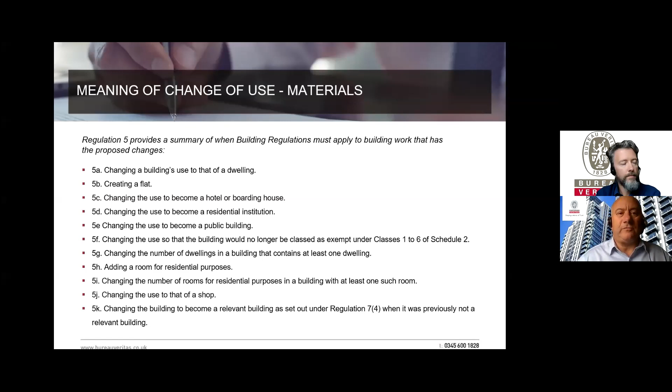So those are the criteria. The government have very nicely given us a new manual to the building regs, and I would advise people, if they get an opportunity, to download that. It's free on the MHCLG website. It's called the Manual to the Building Regs, and it gives a nice little table, which I've sort of embellished a little bit. It talks about the top row with all the types, 5.1, 5A to 5K, and then what the aspects are relevant to these types of buildings.

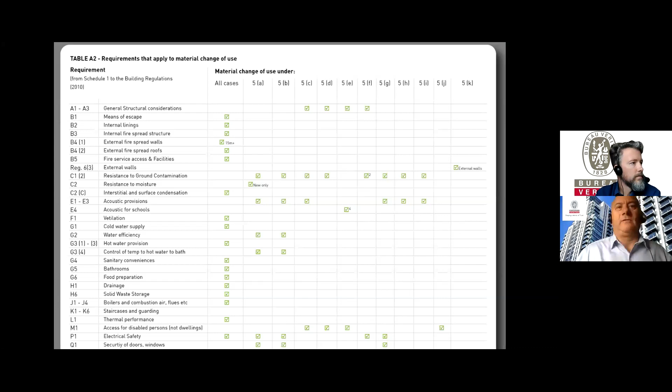Yeah, so that's how you would go through it. So you would pick out, in some cases - for instance, means of escape applies to all of these changes of use - whereas further down the line some, like H2, don't apply to a change of use. H2 would be drainage for storm water and the like. Yeah, so there are issues with that.

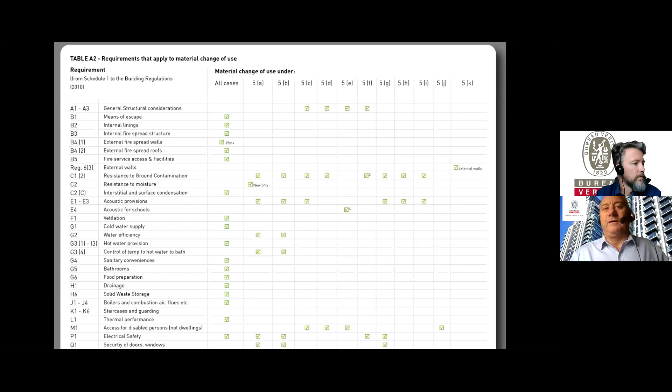And again, staircases - I put staircases in there. If you're not providing any and you're just leaving what is there, that's fine, because there is no requirement to upgrade or provide those staircases unless you are doing it for access, so it becomes part of the new build area. So you don't have to do anything under a change of use.

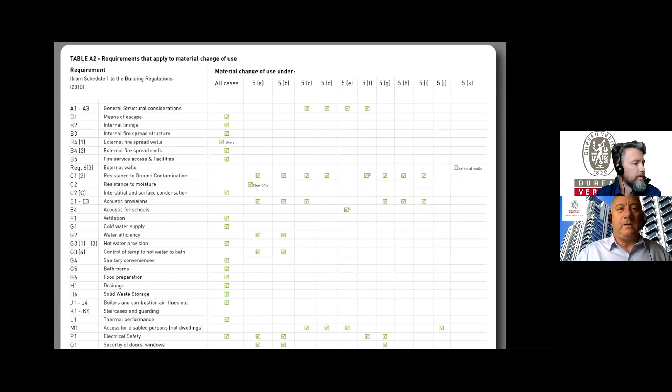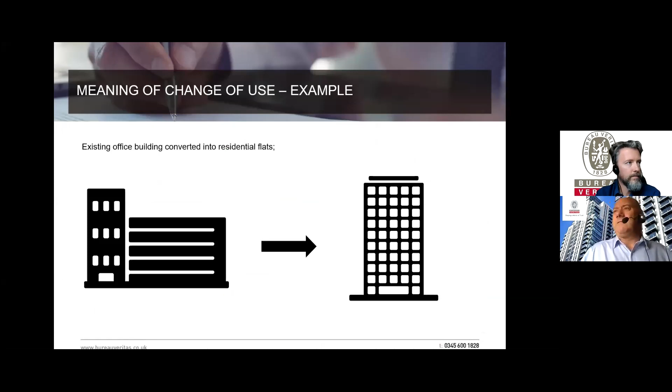Okay, so what do I do? I'll try to explain a typical example where we converted an office into residential flats. It could easily be, and very pertinently at the moment, changing the first and second floor of a retail unit or office unit in the high street to flats, because I think that's the thrust from the government, to release these kinds of developments. So I thought I'd run through that example.

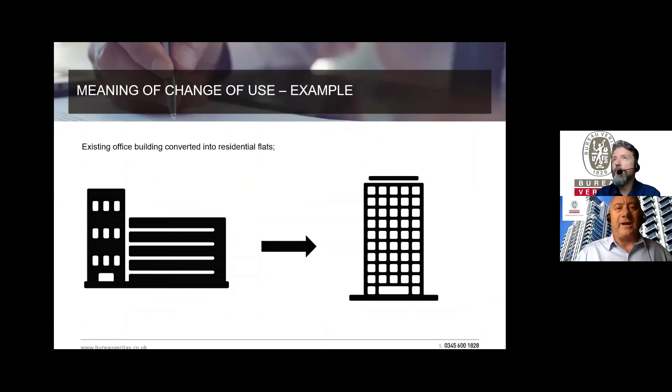I pulled together this table. On the left-hand side are the requirements for the regulations. Note, it is not everything - not all the regulations in what we define as Schedule 1, not all of A to R. You'll see that R isn't included on that list because it's not pertinent. R relates to the provision of broadband. You might want to put it in, but it's not a regulation requirement unless it's a new build.

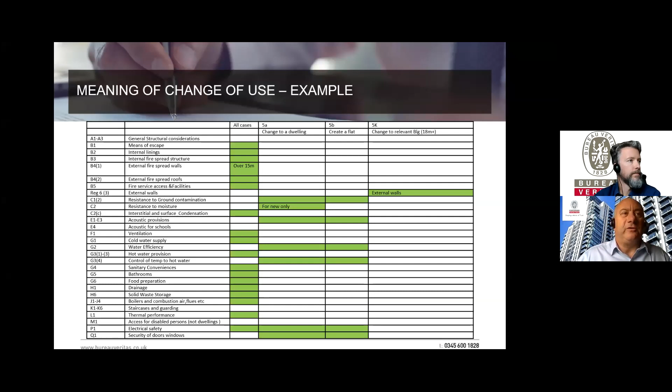The objective is to try and use what you can of the existing building, however making sure only the fundamentals of safety are adhered to. So you can see general means of escape, internal fire linings and structure are all taken care of. Fire spread for the external walls is relevant when it's over 15 meters in height. So if you've got a 2-story or 3-story building, you don't have to undertake an exercise adhering to the external wall fire spread issue because it's really deemed as being low risk.

However, if you look at Regulation 6(3), when you do a conversion to a change of use - let's say this office that happens to be over 18 meters - the external wall will need to comply with the non-combustibility requirement, and that will apply to the whole of the wall. So it's different facets for different parts of the buildings.

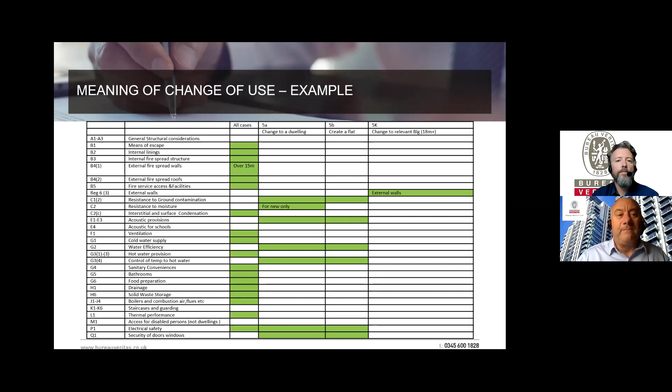You will note that it does not include everything. For instance, acoustics for schools would obviously not apply. And we talked about staircases again - if you're not putting a new staircase in, then you can maintain what you've got there. So there is no requirement to change the staircases.

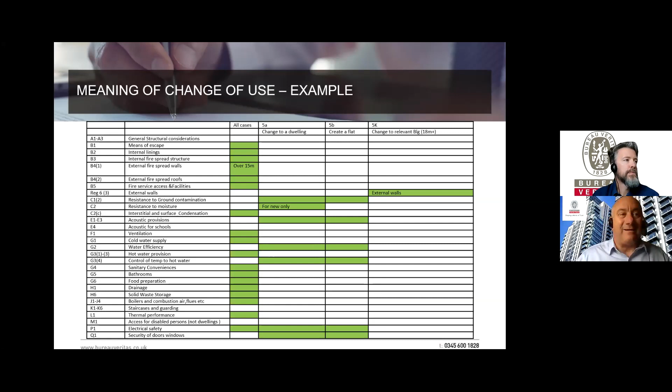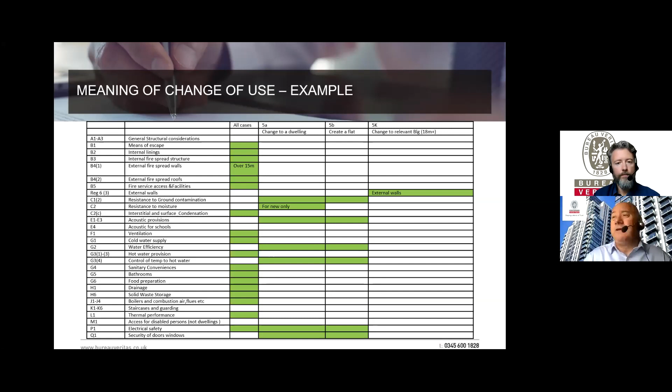So if you've got an office building that you convert, you can leave the staircases as they are. In theory, it should already comply with the basics - the handrails and the nosings. But there will be some instances where offices are quite old that might not comply with that issue, and certainly historic buildings would fall into that remit.

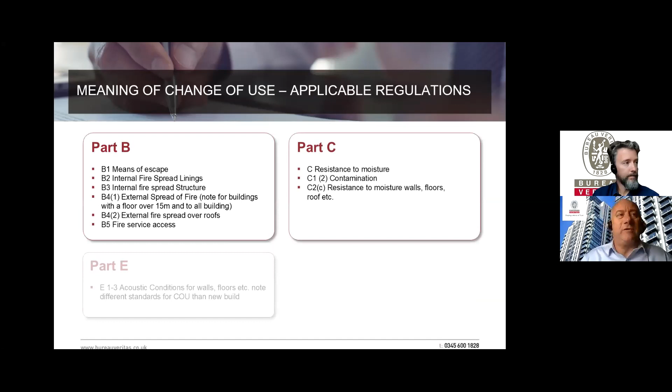Going through the actual requirements, we need to look at the means of escape aspects from the converted flats, or conversion to flats - within the flats themselves, the 9 meter rules, and also in the corridors, down the staircases and out. All that needs to be reviewed against Approved Document B.

Again, things like surface spread of linings - if you've got an office staircase that's got linings that perhaps are not Class 0, then you'd be expected to take them off and replace them with Class 0 linings.

Similarly with structure, you have to be a little careful with that. The requirement is such that if you have a building over 18 meters, you might require an upgrade in the structure, especially when converting to flats. It might then need to be 90 minutes as opposed to 60 minutes, and it depends on what the original building was constructed of. You need to do some investigation to ensure the structure matches up with what's required in Part B.

Talking a bit about external fire spread and spread over roofs - just be careful with the 15-meter issue. Again, you need to take account of the external fire spread when it's over 15 meters, one building to another. Normally you get greater compartmentation and greater fire rating in flats than you would in a typical office, and you need to be aware of that. However, if you go over 18 meters, you will need to think about the non-combustibility aspect.

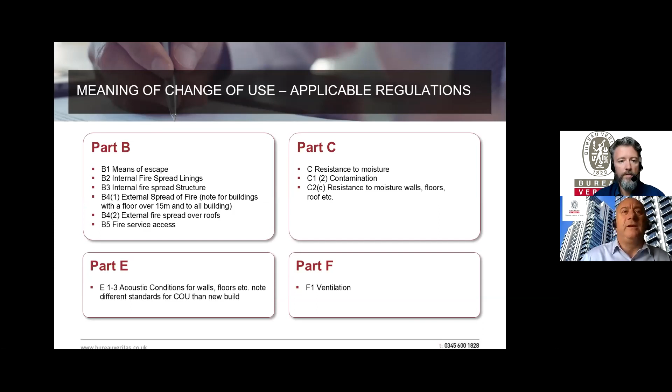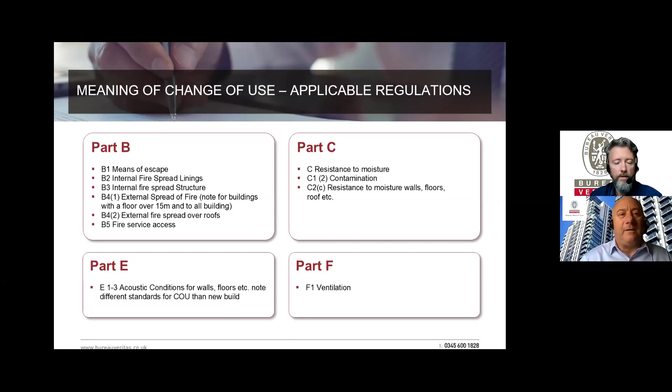Part C, you need to be careful with the resistance to moisture, both in terms of contamination and how we deal with ground floors and basements. And then acoustics, I'll leave it to my colleague Richard when we get to that part. And indeed, you need to think about ventilation, so we must make sure the air quality within our newly converted project complies with Part F in terms of air change rates, WCs having fans, and kitchens having the required extracts.

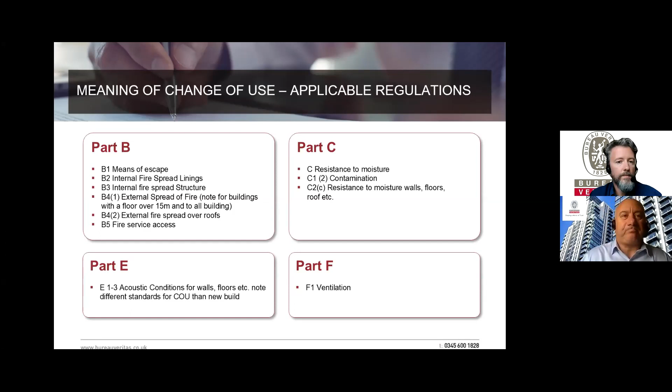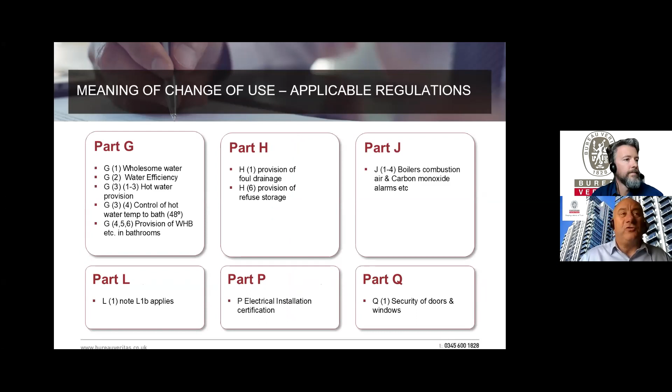It also includes interesting little issues, which are basically down to health and safety. We need to make sure we've got adequate water supply, cold and hot, and that the fittings we put in for the bathrooms are part of the efficiency drive, looking at 125 litres per person per day. We need to control the hot water temperature, and make sure we have provisions for wash hand basins in bathrooms. It'd be silly to provide flats or dwellings without that.

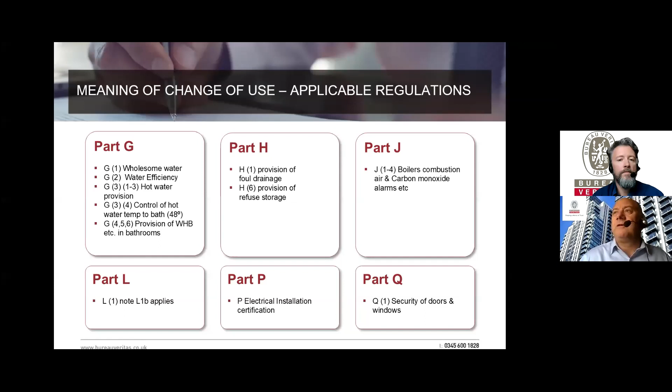Part H - if we're putting in bathrooms, we need to make sure we can adequately drain them, and we also need to make sure we get the required refuse storage, so that we don't pile up waste in the corridors. We have to make sure we've got bin stores and the collection agency all geared up.

Similarly, from a safety aspect, we've got Part J, which talks about boilers, making sure we get the right alarms if we've got that in there, and making sure we get them certified in terms of gas, etc.

And then one of the interesting ones for me is the inclusion of Part L. Just note, when it's a change of use, it is L1B, so there is no specific requirement to provide a SAP calculation. Neither do you formally have to provide that, although a lot of people do, because that's the mechanism to get the EPC, and sometimes if it's a warranty, then you would need to do that.

But from a building regs perspective, you are just moving down to the thermal requirements in terms of the overall U values for walls, and the services need to achieve minimum efficiencies.

Part P is electrics, and the electrics obviously need to be safe and certified - that's a key aspect of Part P for flats. And indeed security, again, is the minimum standard of making sure it's Part Q for the doors and the surrounds around the doors, and indeed making sure that the first floor windows that can easily be reached also have locks on. So that's a broad brush approach.

It is not the full approach to new builds, where it potentially is a little easier, so you have the ability to maneuver with just these being applied.

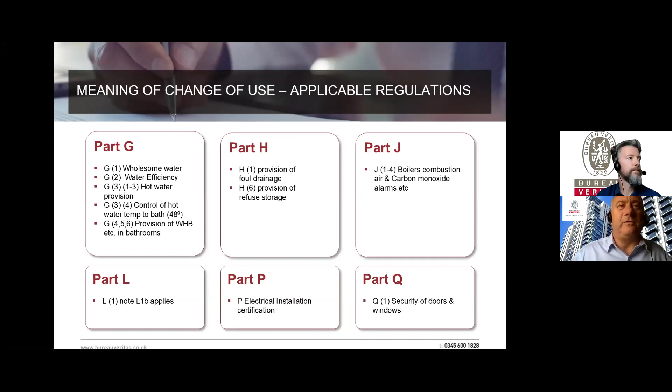Okay, so what I'll do now, I'll hand over to Rick to take us through some of the acoustic issues which form part of these kind of considerations. Rick: Okay, thanks Andy, and good morning everyone. So I've drawn together some of the acoustic considerations, as Andy says, for change of use.

So despite falling under permitted development, before any works commence, prior approval may still be required from the local planning authority in relation to a number of technical matters. Firstly, we need to consider how noise and vibration impacts to current occupiers of the building, as well as adjoining owners and occupiers, will be controlled. A report needs to be submitted to the local planning authority outlining this and the proposed construction working hours.

Secondly, you need to consider whether there's noise from neighbouring commercial premises affecting the future residential units. In doing so, the developer must apply to the local planning authority for a determination as to whether prior approval is needed for it. And that may have a bearing on the final item, compliance with the building regulations in relation to acoustic design of the units, especially if adjoined to commercial premises.

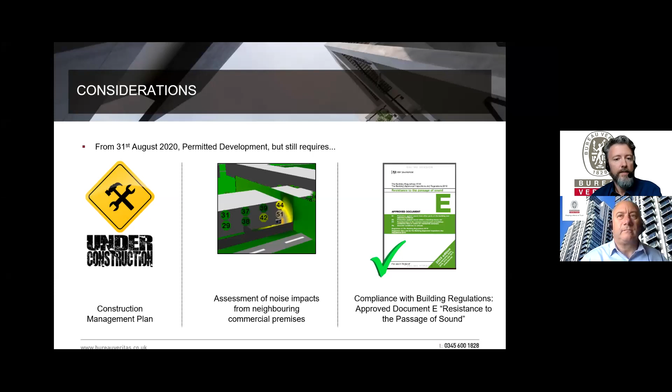So the first item, the construction management plans - these are pretty much well-established requirements, typically prescribed by the local planning authority, and you usually get that information from their website. You should include your expected hours of work.

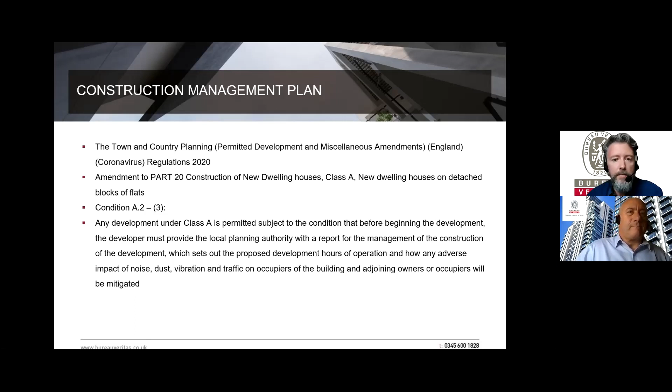Obviously these days people are working from home more, so we can't really assume that neighbours are away at work all day. So we're expecting that noise disturbance complaints are likely to be increasing, with people staying at home exposed to noise from construction works at their neighbours' properties.

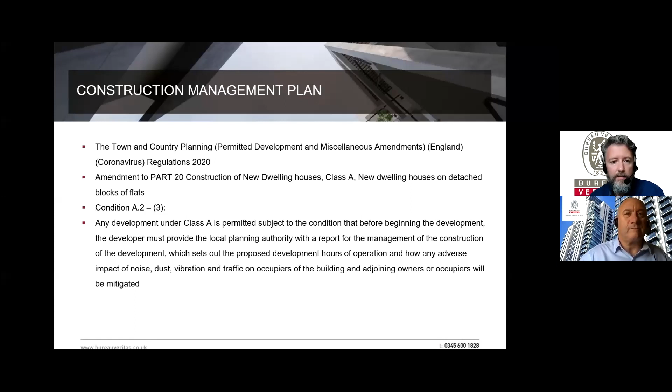And then on the back of that, environmental health officers - we expect them to tighten restrictions wherever they get the opportunity to do so. It's worth noting that noise and vibration measurements aren't often required for these types of works, given the short duration. Where we have had to do such measurements, it's typically been associated with basement excavations where there's more significant structural work going on.

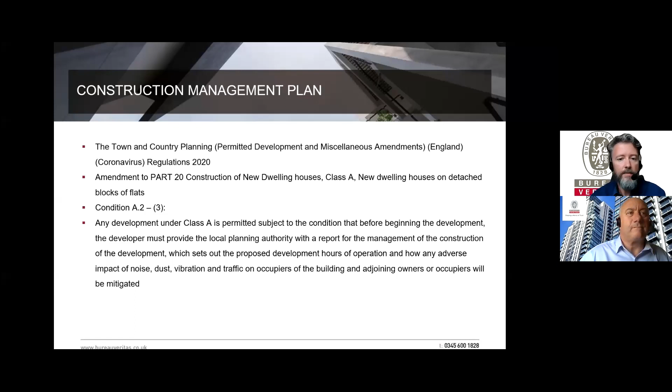Secondly, going on to the neighbouring commercial premises. This is quite a challenge, more so in mixed-use areas, where you might be dealing with noise from restaurant and takeaway kitchen extract units, which might operate into the night time, and also adjoining uses with background or amplified music, or high impact activities such as gyms. These can cause significant disturbance to future residents if not dealt with, so we need to assess the potential impact and mitigate accordingly.

That might take the form of looking at the airborne sound transmission from nearby mechanical plant, so you want to consider whether your glazing and ventilation specification is appropriate, or whether it needs improving. Or you want to look at the sound transmission through adjoining walls and floors, in which case you'll need to do sound insulation tests to determine the performance of the existing partition and identify any potential sound flanking paths.

This investigation might lead to a need for remedial measures, to improve existing constructions or to mitigate those transmission paths. It's best to have a full understanding of this before you start any works, because retrofitting can be costly and cause delays to the project.

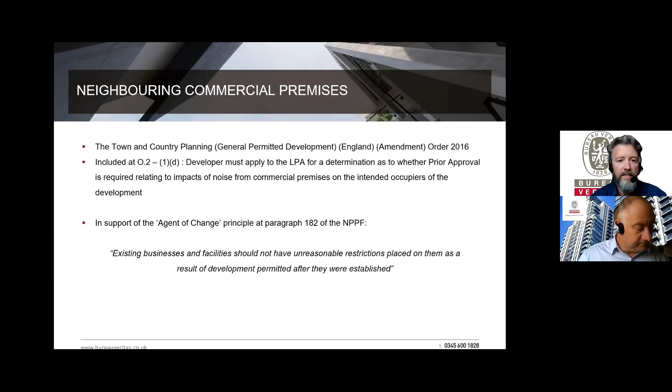In this case, you need to consider the different frequencies of sound being generated and how that might propagate into the building. It's particularly difficult if you're dealing with bassy amplified music, maybe at neighbouring bars or clubs, or adjoining gyms that offer exercise classes.

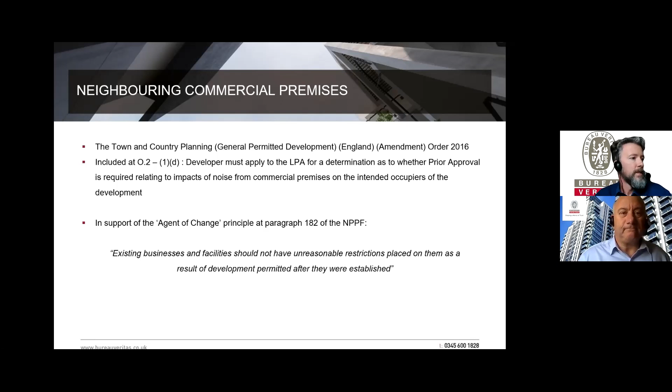So in terms of the building regulations, finally, approved document E defines sound insulation performance requirements for separating building elements, and a requirement to achieve reasonable sound reverberation in common areas.

It's critical to get input from building control and agreement at the outset of the conversion, to confirm that it is a material change of use.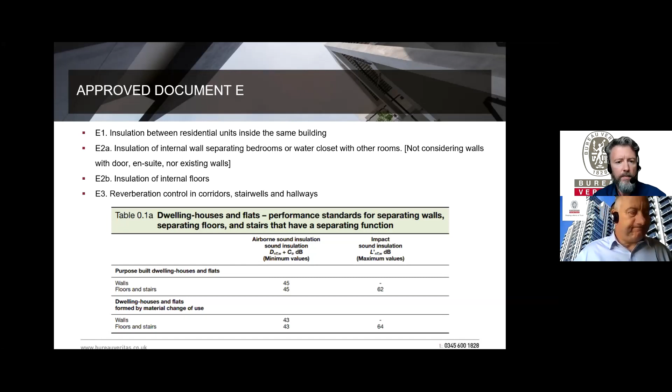So in terms of material change of use to residential, normally the biggest acoustic challenge is incorporating effective junction details, where you have new partitions, for example, meeting existing external walls and internal floors.

As per the previous slide, it's best to undertake acoustic inspection and testing before works commence and identify current sound transmission and flanking paths, as again retrofitting additional measures is likely to be more expensive and lead to abortive work.

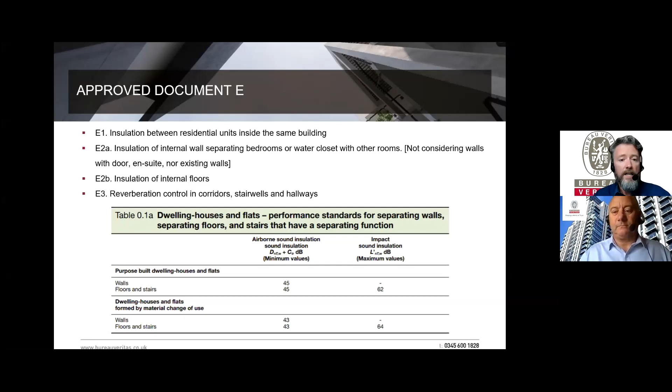And with that, I hand back over to Andy to carry on talking about the other factors in the building regs. Okay, thanks Rick.

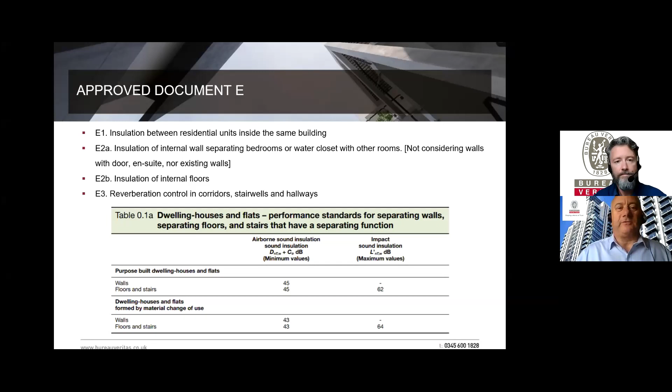I think the reality of the situation is that with the government pressing ahead with the relaxation, if you like, of permitted development, it's important to note these considerations. The government are also very focused on quality of housing, which doesn't just mean new build, so there is a thrust to try and get that quality aspect in.

But noting there is very clear guidance in terms of regulations about what we are required to achieve, which doesn't mean to say that we have to achieve everything a new build would in terms of the regulation aspect. However, it's something to consider. If you're building or converting offices to flats, why would you want a lesser standard, even if it's just a couple of dB reduction, which is allowed in building regs.

So you just need to think carefully about the market and what you're actually constructing or intending to construct. But the regulations are there to ensure the minimum standard - you can always go over it.

Okay, so that was the bit about change of use, and also some of it will flow into part of the other aspects of building works, which are outside the scope of, in theory, new build. One of which is material alteration. Material alteration is a complete definition on its own.

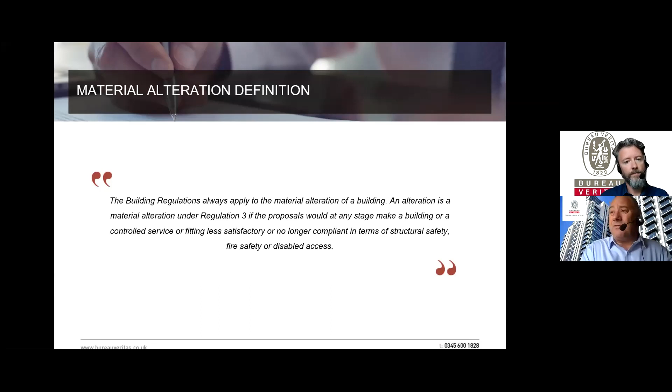The whole concept is not to make the situation worse than it was previously. So if you've got a building, and it applies whatever type of building you're doing, an office or a flat, if you alter the works, the construction, then you just need to make sure you do not make it worse in the majority of cases. And that applies for structural safety, fire safety, and indeed disabled access. So don't make the situation worse than it was previously.

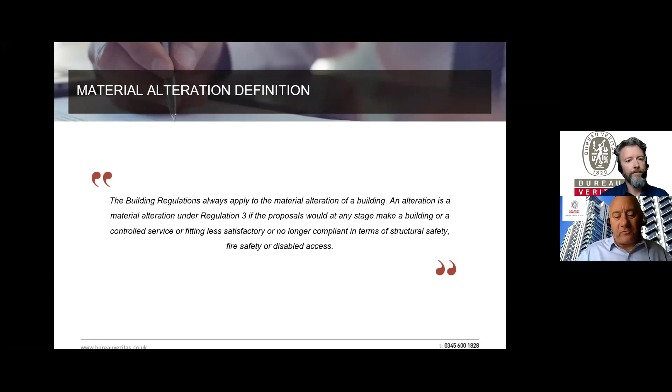Okay, so the third bit that I wanted to highlight on is probably one of the keenest issues, I suppose, is how do we deal with extensions? Domestic extensions are relatively simple. However, how do we deal with blocks of flats, and how do we deal specifically with where we want to put what we call airspace extensions on? So we're building above others, and you can use this analogy for all kinds of types of buildings.

Generally, the extension itself has to fully comply with all the new requirements, A through to R. So they need to fully comply. However, the other bits of the building may not, and you may get a conglomeration of aspects.

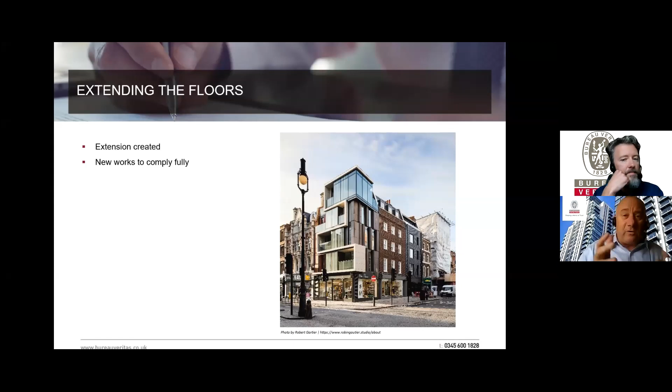You may get an extension, which is built on the side, the back, the front, or on top, and you may get a conversion or change of use for perhaps an office to change some of the lower floors into residential. And then you may get a material alteration where you are reconfiguring the shops at ground floor. So you're going to get a mix of all those together to formulate your plans for redevelopment of a particular site or building.

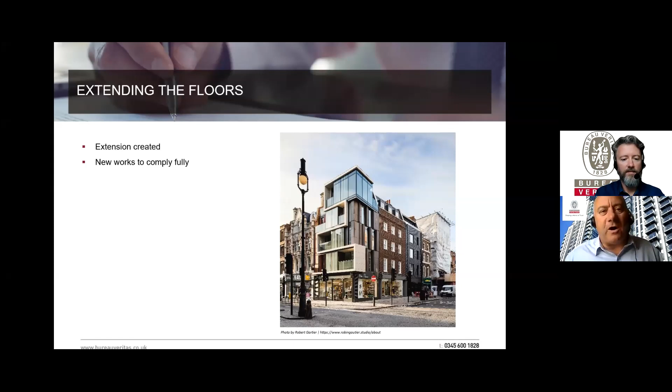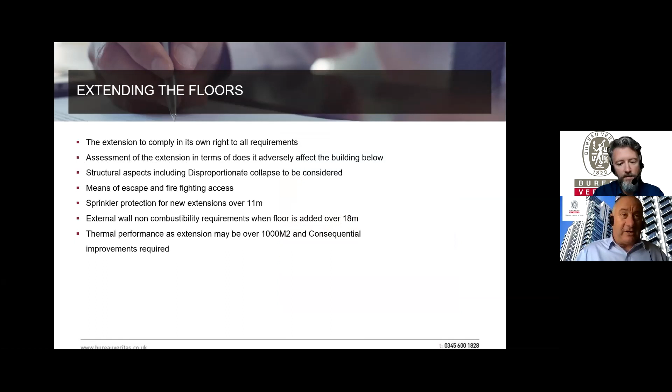And all of which comes with a different set of requirements, and it isn't a one brush fits all. So we just need to be a little careful on how we apply aspects and what we apply when. The government have got some quite strong thoughts on that, but they need to be aware of what the requirements currently are. So in terms of an extension, let's say we've got a 3 or 4 story office building.

And we put an extension on the top for a typical flat development, then the extension would need to comply in its own right with all the requirements. We need to be very careful with that, especially with the new introduction of sprinklers in residential buildings over 11 meters. So if your 5th story addition comes on, then you will be required to provide sprinklers in the new extension for sure.

It does not, though, mean that you have to provide sprinklers throughout the rest of the building, although I guess a lot of fire departments and indeed building control may recommend that you provide it throughout, but sometimes that is not feasible. So we just need to think about what we do, and does the upper part of the building adversely affect the lower part.

We need to think about the structural aspects and making sure that whatever we put above in terms of the extension doesn't add a disproportionate collapse aspect to the building. So if one of the members' columns or part of the floor collapses on the lower part, does that need to be strengthened? Does that need to be tied in, because you've now added an extension on top of the building? We just need to be cognizant of that for the disproportionate collapse aspect. Means of escape and firefighting access is very key.

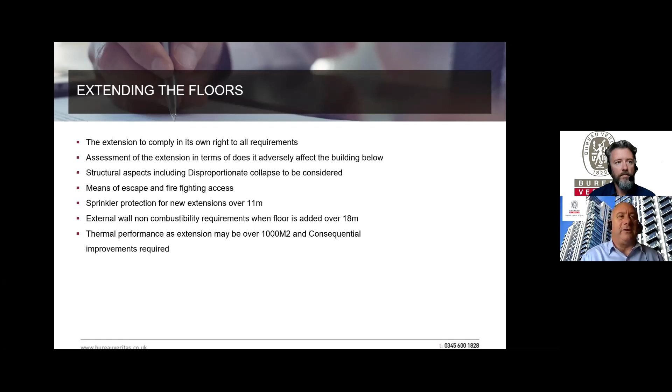So we need to make sure we can get people out, and we need to make sure we can get the fire brigade into the building. If you're building extensions over various heights, 18 meters for certain, you'll need consideration of a firefighting shaft, and potentially a firefighting lift if it's over 18 meters. So we need to be careful with that, as it will bring issues for the existing building you're reviewing. Even if you build a block of flats 2-3 stories above an office development that's currently there, you will need to take account of the offices when looking at the firefighting shaft.

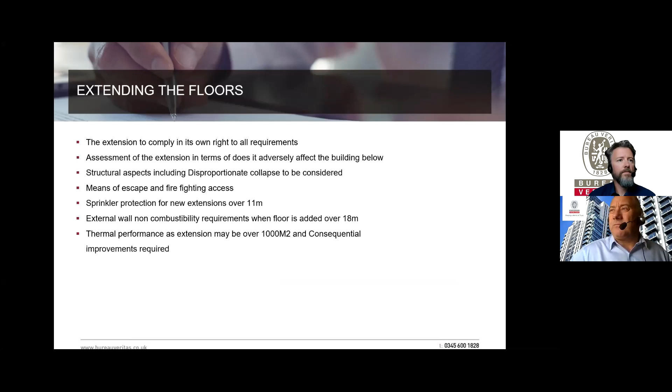So you need to be careful with the codes and how you apply them. The expectation is that the extension will fully comply. If that means it's connected to the offices, you need to think about how many staircases you've got. If it's a single staircase connecting over more than 3-4 stories, you need to think about what added protection you need to provide to stairs and lobbies, etc.

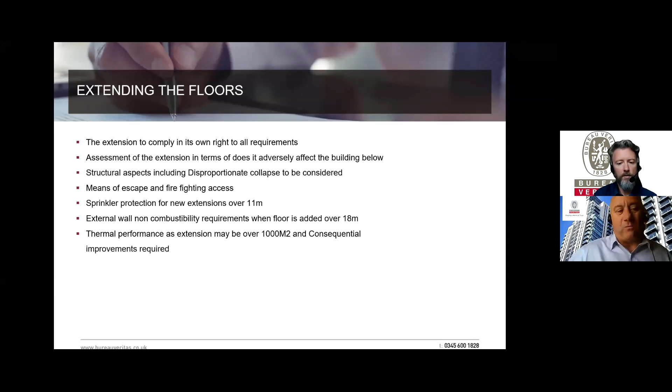One of the requirements under the change of use is to think about the external wall and the non-combustibility requirements. Clearly, if you build an extension over 18 meters, that part of the wall would have to comply. But under the change of use, you would also need to ensure the rest of the wall complies with the non-combustibility requirements. It isn't simply acceptable to cap it off and say whatever's built below can stay, because that would have an adverse effect on the extension above.

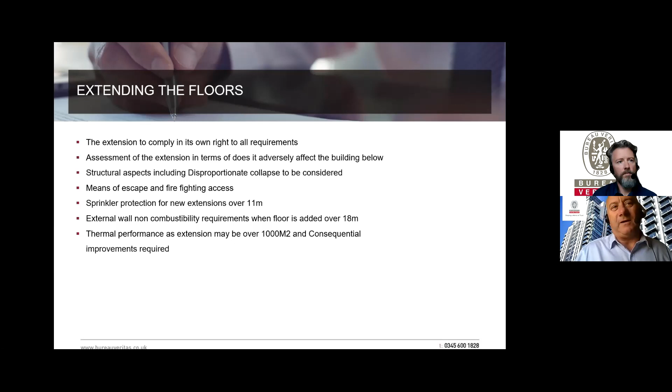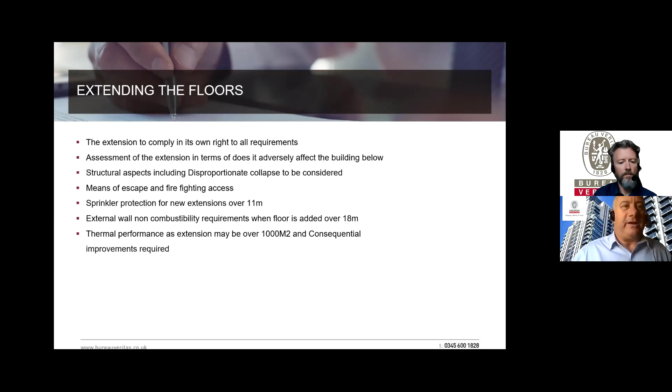Thermal performance - one of the interesting things is that the government, when they published some guidance, talked about consequential improvement, although I'm not absolutely sure myself that this would be applicable. We need to think about the square meterage. If it's over 1,000 square meters, you may have to look at consequential improvements on the existing work, which would be an interesting concept to implement, especially when you're building an extension but not doing much work to the existing building below.

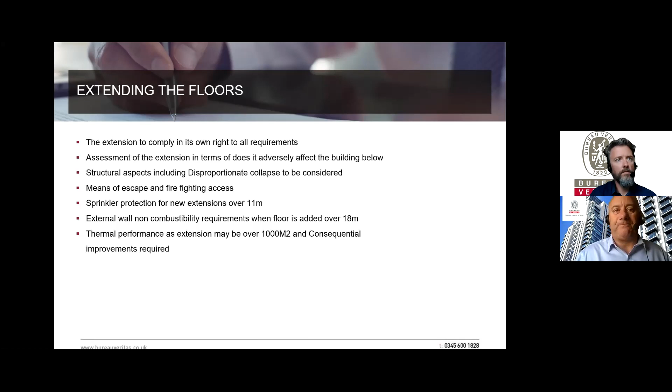So some of the key aspects, especially when talking about extensions above existing buildings and what's called building over the airspace, you need to make sure the means of escape is correct. The way to do that is to ensure you comply as fully as you can with the requirements from ADB or BS 9991 or BS 9999. And if you can't, then you need to look at a fire engineered type solution.

Travel distances are normally 9 meters for typical developments in town centres, but where permitted development is targeted, you should be looking at the smaller end of flats. You can have staircases, but for duplexes they should be protected staircases. You need to make sure the corridors themselves are fully protected, and where there's a requirement for ventilation, put them in either as a ventilated corridor, which is up to 7.5 meters with a natural vent solution. If you put sprinklers in the flats, you can go up to 15 meters with a natural ventilation system.

If you go outside of that and go longer in terms of the corridor, then you're into mechanical ventilation, and you need to make sure you adhere to the Smoke Control Association guide for the positioning of the vent, which needs to be at least 2/3 down the corridor, and make sure all the equipment is in line with that guidance, with the necessary backup and power supply, etc.

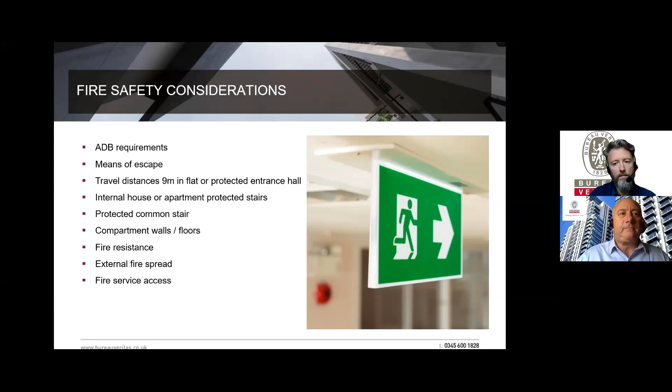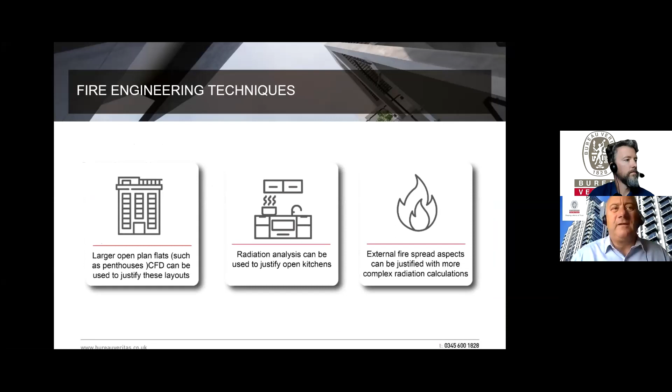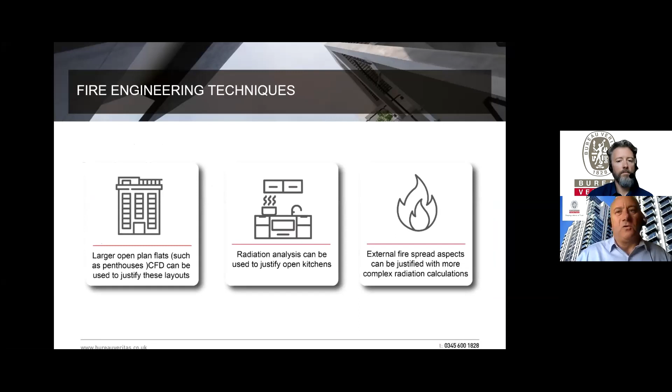Okay, there are some engineering techniques you can use for larger open flats, such as CFD. You need to think about the positions of kitchens and where they lie in terms of the escape routes, and there is potential for radiation analysis. You can do some more complicated requirements for fire spread, which rely upon the radiation calculations, all of which will need a fire engineer to assist you with.

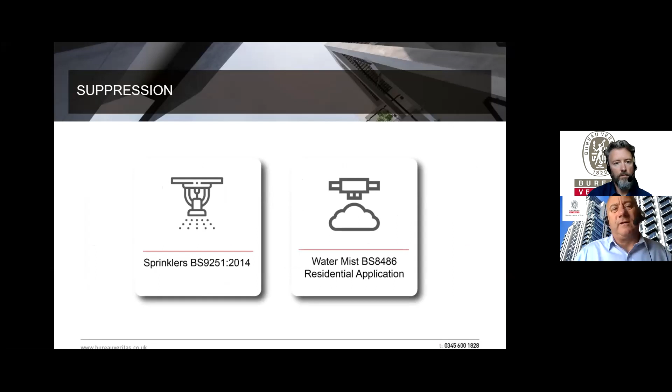Suppression, very key. We talked about the new part of the construction, i.e. the extension, needing to have suppression. It can be sprinklers, but it can equally be water mist. There are difficulties sometimes with tank sizes, and the water mist would be an added advantage. It also has the advantage of less damage in terms of its water application. So there are some plus points cost-wise, though I'm told that they're probably equal.

Again, we talked a little bit about firefighting, making sure we've got adequate fire brigade access, and just think about basements. If you develop a basement, you need to think about getting people down there and smoke control, etc. So it's well worth reviewing that in terms of either a change of use or whether it's part of the extension.

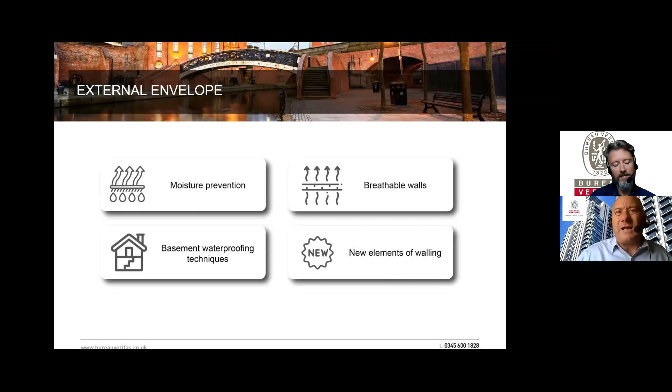Other aspects of building regulations, and we've talked through a lot of these, but just be careful with that. Obviously, if the extension has parts of it, then it's a higher standard than the change of use. We've obviously got to try and make sure we don't get water in the building. But some of the buildings can have breathable walls. We've got historic buildings that we've got to deal with, so we need to be a little careful with how we approach that.

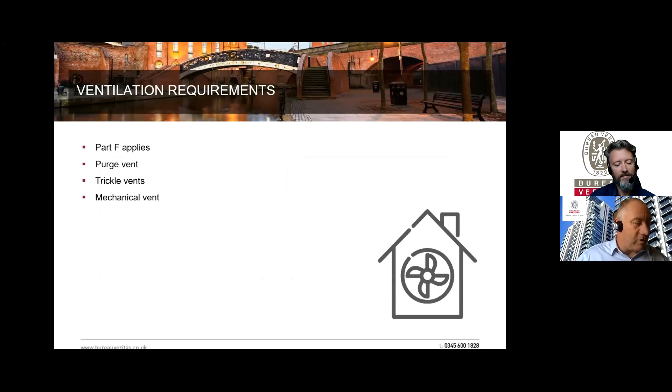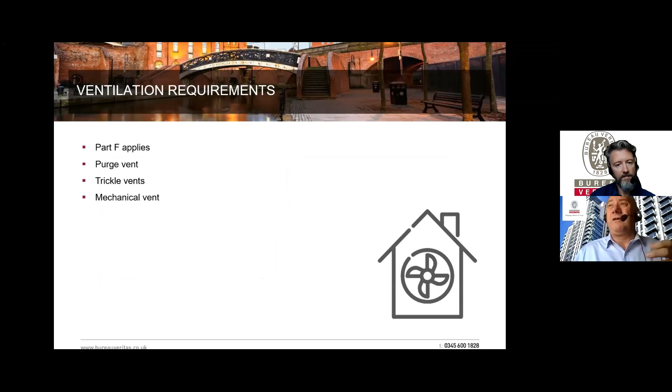Ventilation is key. Obviously want to make sure that buildings are constructed in line with the requirements of Part F, making sure we've got purge vent so the windows can open. If you've got a problem with the windows opening because they're on the facade, then you're going to have to look at mechanical ventilation solutions, which can be quite tricky because they end up with bigger units, bigger ductwork, and obviously bigger risers, which are difficult to get into buildings, especially if they're existing scenarios.

We need to do water use calculations. They are relatively simplistic now. There are tables that you can use, and you can just get the fittings off the contractor, and you can calculate those out. Pretty simple. And to make sure we can adequately drain to reasonable existing places of drainage, so we don't overload the sewers, and making sure that it can all be roddable throughout.

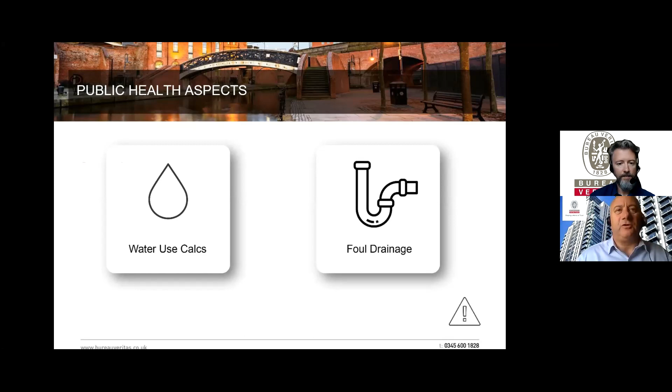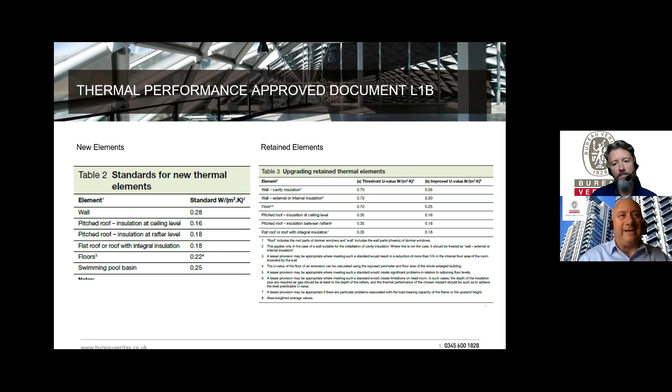Some other aspects of thermal performance. Again, for the extension, you will be using L1A, so you would need a SAP calculation for L1A. But if you're doing the change of use, then you are into this scenario of looking at the thermal performance of the fabric, which is a more simplistic issue. It becomes more complicated if you want to deviate, and then you're using the SAP calculation itself as part of the methodology for the deviation when you're looking at change of use. So that is available to use, but again is a more complicated scenario.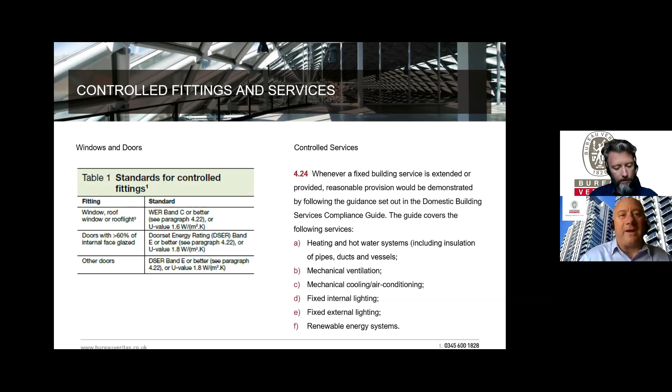Obviously, you've got to make sure that the fixed building services are relatively efficient, and they cover ventilation, the heating, the lighting, and potential for renewable energy if you're going down that avenue. Although, again, if it's not a planning issue, because you're doing a change of use, then you won't have a planning problem because there is no planning application for it. However, if you're building an extension, then you might be into the planning aspect, which is slightly different. Okay, so that's how we deal with the SAP calculations.

And then finally, the requirement for security again is important. Making sure we get PAS 24 standard for the doors and the surrounds. Making sure we ensure we get the adequate robustness for surrounds of doors, and making sure we get the locking mechanisms right for doors and windows, especially when the windows are accessible.

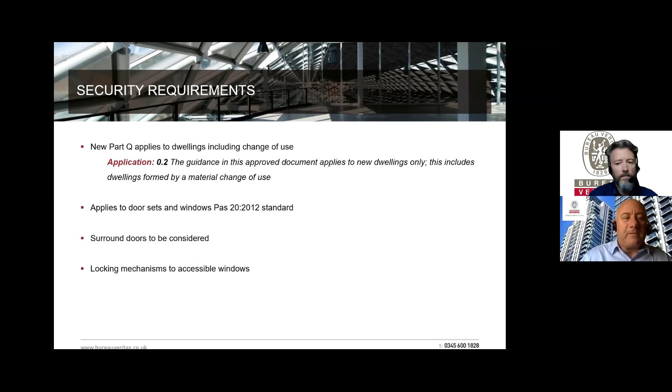So that's really a rattle through a lot of the aspects that will apply for the change of use. Some of the aspects that look at the material alterations, and indeed the extensions, which I think is going to be the biggest challenge. And I guess a lot of the developments that we're seeing coming forward now, because of the permitted development, will allow a conglomeration of a lot of these issues.

So you'll get them all on the same project. It's not easy to navigate, and we just need to be cognizant of these highlighted issues of fire safety, thermal performance, acoustics, security, and the like.

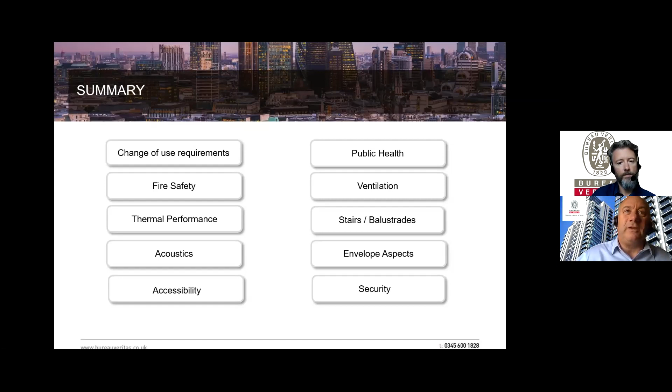Just a note, though, if you're thinking why is Part M not applied - well, for dwellings, it doesn't. So you are not required to provide Part M compliant dwellings if you're doing a change of use. However, if you were building an extension, then Part M would apply, and the extension would need to comply with either M4(1), Category 1, Category 2, or Category 3. However, if you were converting the lower parts of the building into flats, there is no requirement to undertake that - so it is quite a complicated aspect.

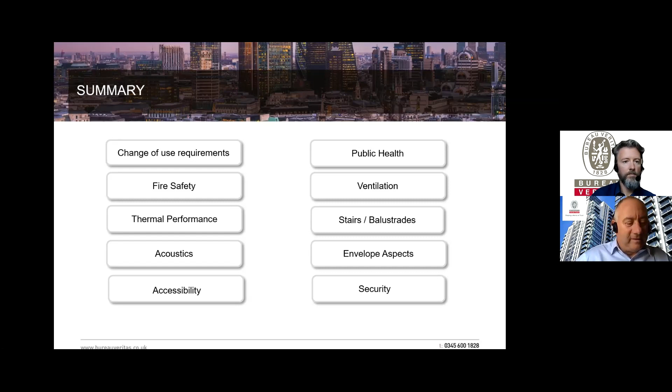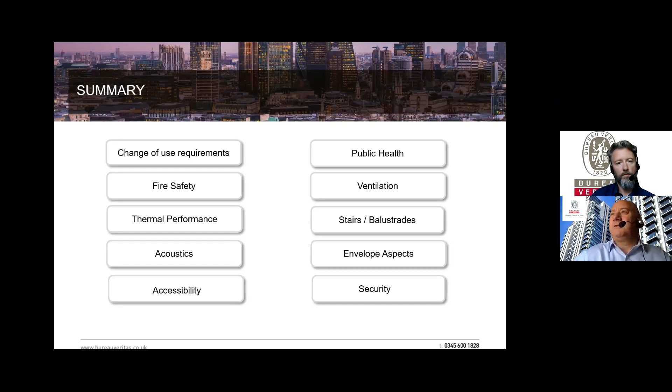The government are looking at that at the moment and are trying to remove the requirement for Category 1, which is what's called the visitable buildings. So that's an overview of where we are.

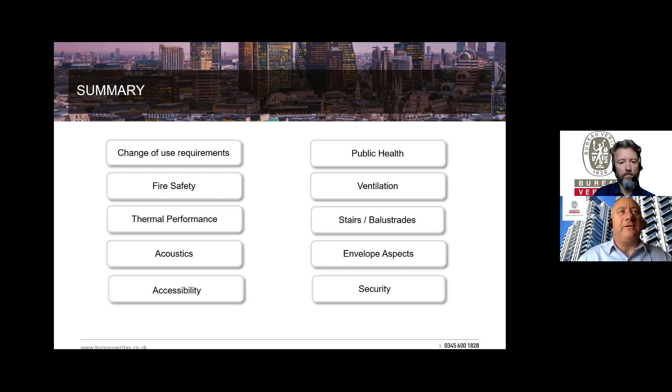Okay, thanks Steve, I think we're just about there in terms of our timings. Perfect timing. Thanks, Andy. So thanks to both of you, Andy and Rick, that was really good, and I hope the audience found the session useful.

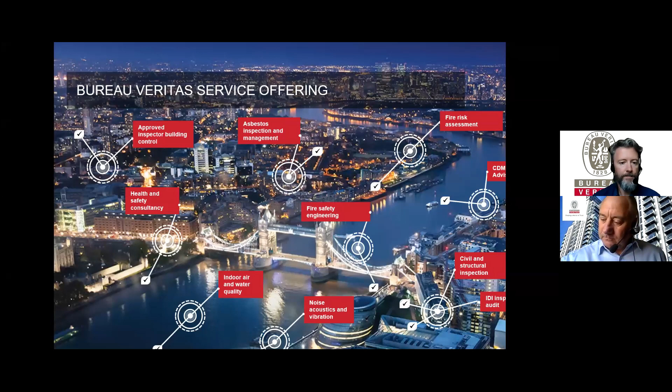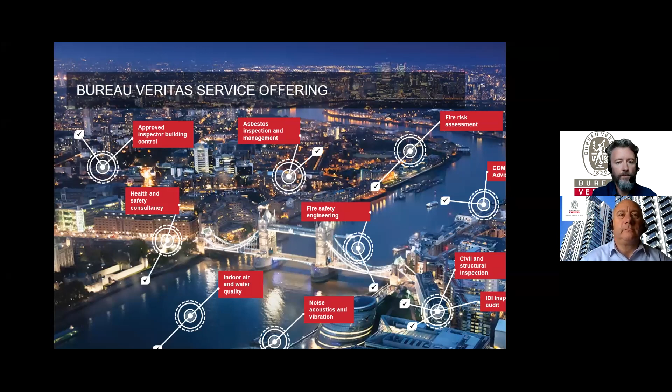So we'll move on, we've had a few questions in. We had some around the sprinkler provision, so I think it may be worth clarifying this, Andy. So clear on the extensions over 11 metres, that all seems quite fine, but in terms of a straight change of use - so we've got no extension, but the building is over 11 metres, so we may be going from office to residential - can you just recap on the provision for sprinklers?

Yeah, in theory it only applies to new build. So if you're building an extension to a block or building a new build block of flats, then the sprinkler is required, but not for a change of use. It's quite clear the government have said they will reconsult on how they deal with the existing building stock in terms of the sprinkler issue. They would obviously like you to do it, but they can't force it. So it may be that you end up having to provide sprinklers to existing buildings under change of use if you are compensating for other aspects like the open flat layouts or some other fire resistance issue you might encounter. But generally speaking, you're not required to provide sprinklers under the new ADB, which comes out in November.

Okay, great, thanks for that, Andy. One for you, well, I've got a couple here for you, Rick.